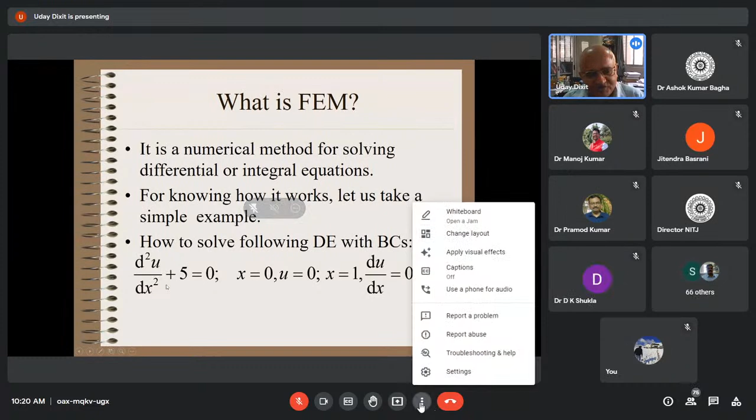Now, I have deliberately chosen a very simple example. Suppose this differential equation has been given to you: d²u/dx² + 5 = 0. At x = 0, u = 0. At x = 1, du/dx = 0. So these two boundary conditions have been given. This is a second order differential equation.

If I ask you what is the solution of this, you can easily tell me. It is very easy in this case, because you just say d²u/dx² = -5, and then you integrate it two times, double integration, and you get back the value of u. But because of integrating two times, you will get two constants of integration also. Those constants will be found by applying these two boundary conditions. That's why you need two boundary conditions, because with one boundary condition you cannot solve it.

So you will say that the solution is u = 5x - 2.5x². You will give me the solution, is it not? Because you just integrate. First time I integrated, I got -5x plus a constant. Then I integrated again, I got -2.5x² + ax + b, like that. And then you put the boundary conditions and you give this one.

Now, let us say that I am your teacher and you are my students, and I just want to judge you. So I give this problem and you give me the solution. But let us say I myself do not know. I am a very weak teacher, or maybe not weak, but absent-minded. I forgot how to integrate. But as a teacher, I have to check whether what you have given me, u = 5x - 2.5x², is right or not, because I have to give marks on that basis. So how do I do that?

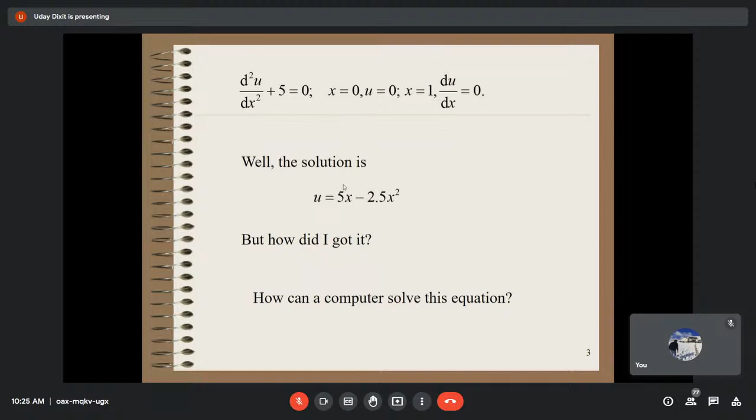Now the question is, if a computer has to check the solution in place of me, probably the computer also can check in that way. But now think of the reverse problem. Suppose the computer has to solve the equation. The computer does not know proper integration, although some software does integration nowadays. This problem is simple, but for a very complicated differential equation, how will the computer solve it? There are many techniques, but I am telling another way, like I have done.

One way is that a computer keeps substituting a number of functions in the equation. The function which satisfies the differential equation and boundary conditions is the correct solution. With this type of method, I don't have to teach any complicated algorithm to the computer, and my task becomes very simple. Let the computer assume a number of functions and try to fit the one which satisfies the equation and boundary conditions.

That becomes the correct solution. Can a computer do that type of thing? This idea looks very simple, because instead of learning the methods for solving the equations, this is a much easier approach: we just pick one. Is it not? You see, our forefathers also many times used to pose complicated problems to children as puzzles.

Many interesting puzzles of this type: suppose some people have gone to somebody's house and he has a number of cots. If he gives one cot to each guest to sleep, then there will be a shortage of one cot. And if he does it otherwise, two persons share one cot, then one cot will be unused. So what is the answer? Children are asked this type of thing.

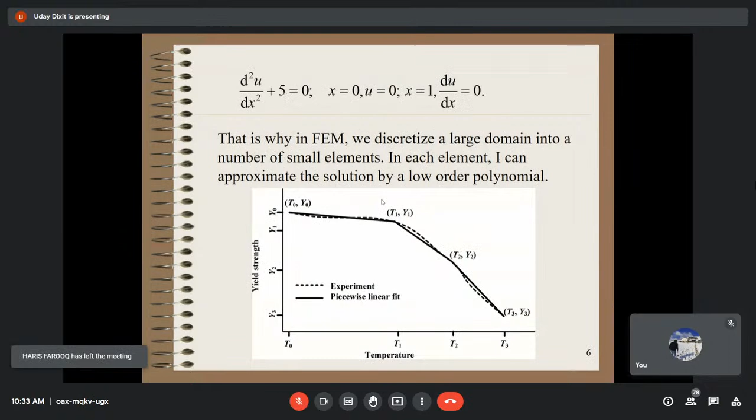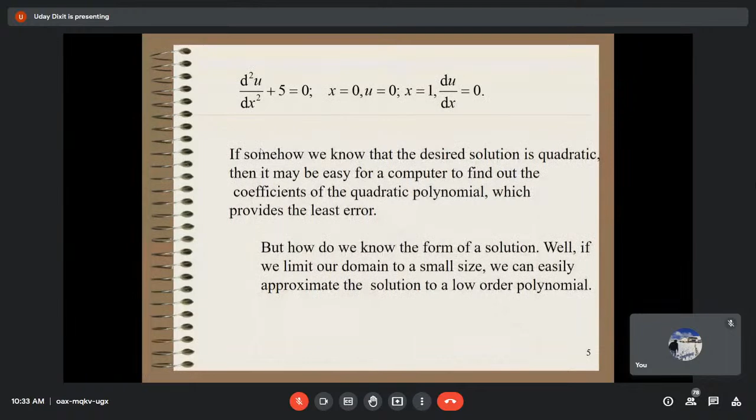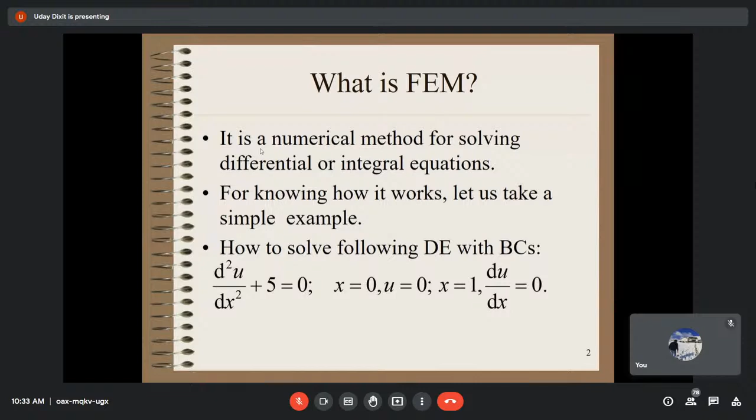So then with this, let me expand the definition, which I just said in only a few sentences. Now I am telling a little bit more, because otherwise the person who is interviewing you will not be happy. He asked you FEM and you answered it is a numerical method for solving differential or integral equations. Then he said, okay, even FDM, finite difference, also does that. Even Simpson, Runge-Kutta also does that. So let us expand the definition with this background.

So FEM is a numerical method of solving differential or integral equations in which the domain is discretized into a number of small elements, and in each element a simple form of the solution function is assumed, and an attempt is made to find out the parameters of the function by minimizing the error of the solution.

If you understand this definition very carefully, then you will understand the difference between finite difference method and finite element method. Many people are not clear about that difference. Finite difference is just what we have studied in class 12. In fact, before differential calculus came, such problems used to be solved only by finite difference. Suppose you say, what is the relation between velocity and displacement?

Now if I ask any student of class 12 to tell me mathematically, he will say V is equal to ds by dt, isn't it? That means it is the derivative of the displacement field. Okay, you get a velocity field.

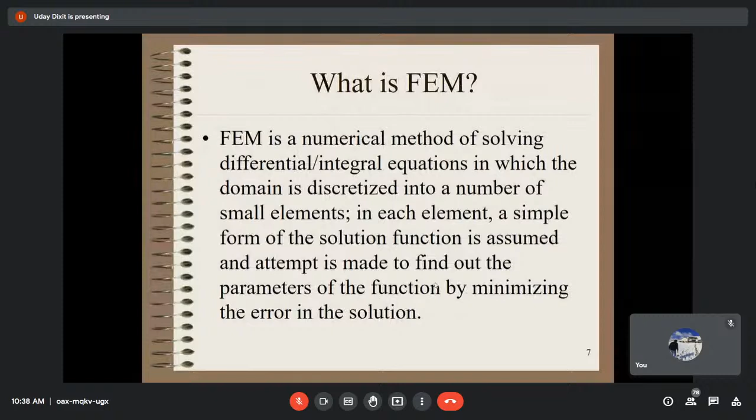But then why do we find the solution in the form of nodal values? Because many teachers and most people will make the element, make a diagram, show small elements, then show nodes. So the question I want to raise is about nodal values.

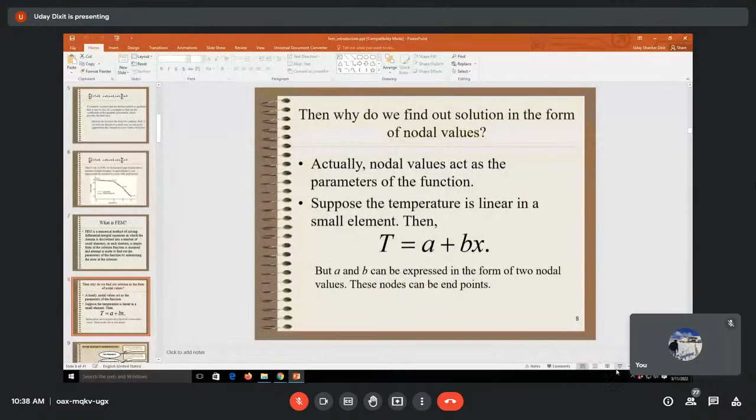Okay, so in this case the question becomes - why do we find nodal values? Because when I say find the parameters of the function that has been fitted, nodal values act as the parameters of the function. This point also has to be understood.

I gave the example already in my previous slides - suppose a temperature distribution. Many mechanical engineering people, as Pramod ji said, are doing heat transfer. So in heat transfer, suppose you have a temperature field. Now that temperature field is very complicated. But then what do you do? You can assume that in a small domain, it is linear. Let's say you are solving a 1D problem. Even in a 1D problem, the temperature distribution may be very complicated. But you assume that in a small element, T is equal to A plus Bx.

And then for each element, you find the value of A and B. And if you have done this, this is FEM. But then you may say, okay sir, some of you have been exposed to this - no, this is not FEM, we don't find A and B, we find the nodal values at the endpoints. We find T1, T2. My software only gives T1, T2, the values at the node.

So I want to say, okay, open your mind. You are actually finding A, B basically, not just nodal values, because T1, T2 at two locations can be expressed in terms of A and B. So that is what you are basically doing. That means you are not doing any finite difference thing. It's not that you are finding the values at the nodes - you are finding the complete function. So therefore, you can also add some constant which doesn't have any physical meaning.

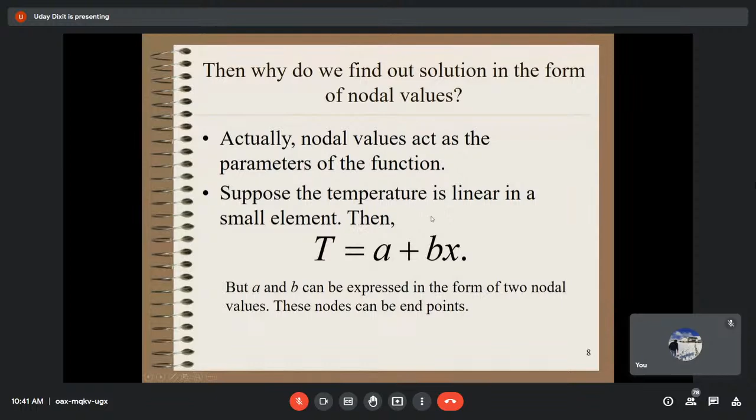It may not be nodal values. Nowadays we do P refinement - those type of things where we just add something which doesn't have any physical meaning. Nodal temperatures have physical meaning - that at this node, this is the temperature. But you can add something, some incompatible mode. So in future, you may get that type of situation. That's why I wanted to widen that thing - don't think you are only doing nodal values. You are finding the complete function in that small domain. And then with that function, you can find the value at any place.

So in general, what is the finite element methodology with this now? What does it do? The first step is pre-processing, okay?

In finite element packages, pre-processors are there. Here you make a geometry, and that geometry is discretized into a number of small elements, which is called mesh generation. Mesh generation itself is sometimes a very important activity, and many people in computer graphics work on automatic mesh generation.

Otherwise, manually also you can make it - you have a domain, you discretize it. If it is a 2D problem, you can have a number of triangles, you can have a rectangular one, or other shapes. So this is the pre-processing step, and then you can assign material properties, etc.

Before doing the FEM, you make this preparation. Then, because we discretize into a number of elements, for each element algebraic equations are found. This can be done by various methods, even direct FEM formulation based on the physics, but there are other methods too, which we'll touch upon a little. This part, how to make the elemental equations based on the differential equation, requires some skill.

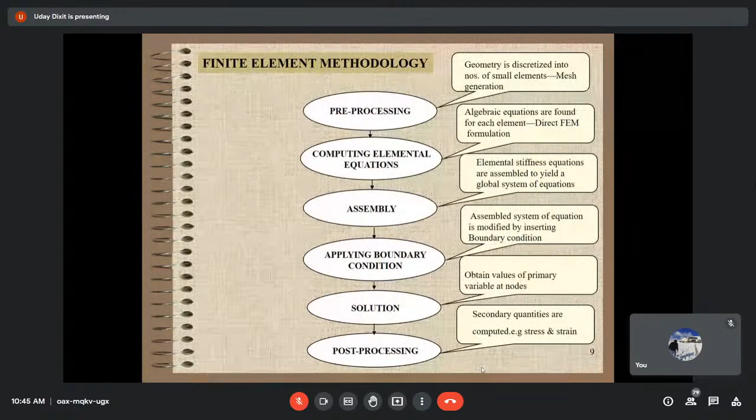So packages will have a pre-processor, a processor that combines all these steps, and then a post-processor. Now the question is how the package does it, or how FEM works - I am explaining this with a very simple toy type of problem. But if you listen carefully, you will understand that this is something you can learn and do.

What is that problem? It is a direct FEM formulation of an axial rod problem. This is an axial rod, I am stretching it by applying a load P. In this case, the deflection becomes PL by AE, where A is the uniform cross section. So it's an obvious problem, but let us try to do it by FEM - let us say I don't know that the deflection is PL by AE.

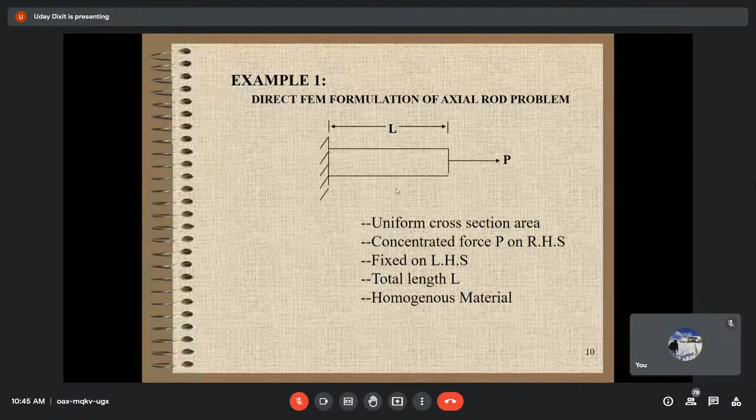I have taken a very simple example, but you can have a tapered rod, and for that problem you will face difficulty. If material properties change from point to point, you will also face difficulty. But in FEM, for each material - suppose up to first half it is brass and up to second half it is steel - you can make two elements, putting the property of brass here and steel there. So there are advantages, but for explaining purposes I take a very simple example so you can keep understanding.

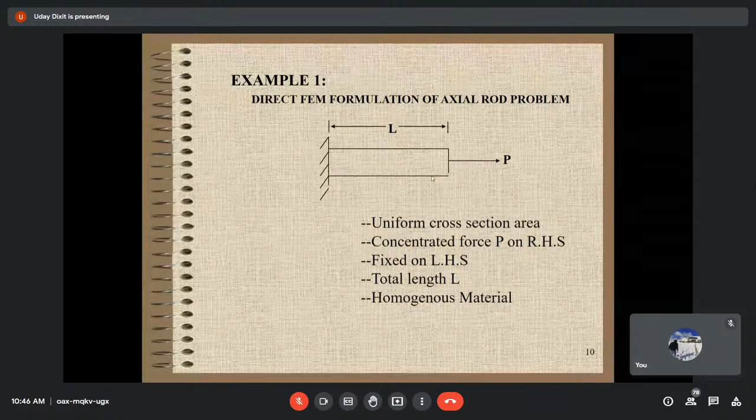So the first step is pre-processing. Whatever rod was given to me, I divided it into 3 elements - element 1, 2, 3, with nodes 1, 2, 3, 4. Then I want to make the elemental equation, so I choose a typical element, and here this is Fi, this is Fj, this is node i, this is node j. Then for each element I write some equations based on our understanding.

Say strain epsilon t, tensile strain is uj minus ui by h, because suppose it got stressed by j, uj, and this is ui. So uj minus ui is the relative stretching, divided by h, then stress becomes multiplied by E, then force becomes multiplied by area.

This comes from our basic understanding that AE times uj minus ui by h is equal to Fj. Now if I focus my attention on the ith node, and say that i is getting compressed, then compressive strain is Ui minus Uj divided by H, stress sigma C equals E into Ui minus Uj by H, and force equals AE times Ui minus Uj by H, which equals minus Fi.

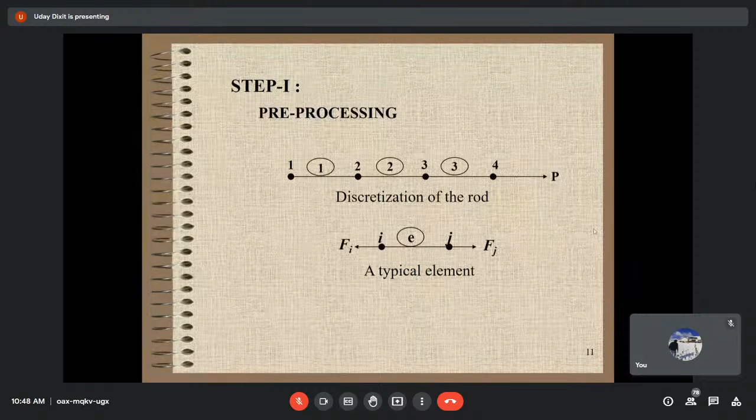Maybe some of you who have studied mechanics may immediately ask: sir, will Fi be equal to Fj? I say okay, fine, it will be equal, but I am just writing it this general way for now. Don't worry about that - the equations are also showing that AE times Uj minus Ui by H is nothing but the negative of Ui minus Uj by H, so of course they will be equal, but for the time being allow me to write it in the general way.

So this is AE by H times the matrix 1 minus 1, minus 1 1, times Ui Uj, equal to minus Fi, Fj. What I have done is written these two equations in the form of a matrix, because after all, what is the major use of matrix algebra? Why do we study matrices? Because I can express my equations in matrix form. So what you are seeing is nothing but these two equations.

So we say Ke Ue equals Fe. We call this coefficient matrix Ke, this Ue, and this Fe. With the analogy of the spring mass system, I say Kx equals F. So K becomes the stiffness matrix - K is the spring constant, so stiffness - and U becomes the displacement vector, and F becomes the load vector.

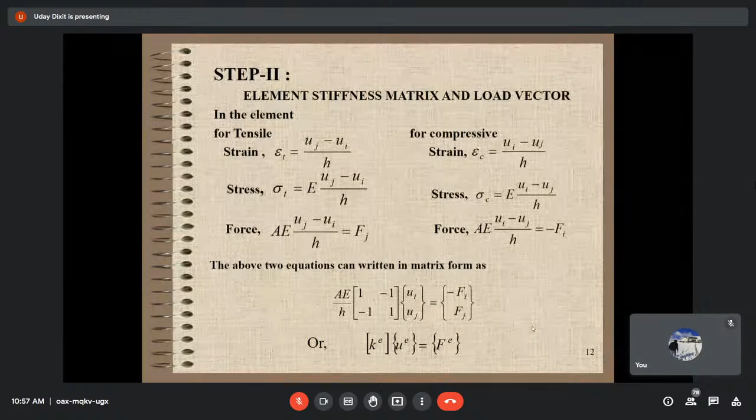This is the mistake many people make. Sometimes a simple thing becomes very difficult to explain. Complicated things people understand very easily. So pay attention to this part. It is very simple, but 90% of students do not understand, and with great difficulty, I spend half an hour, then they get the idea.

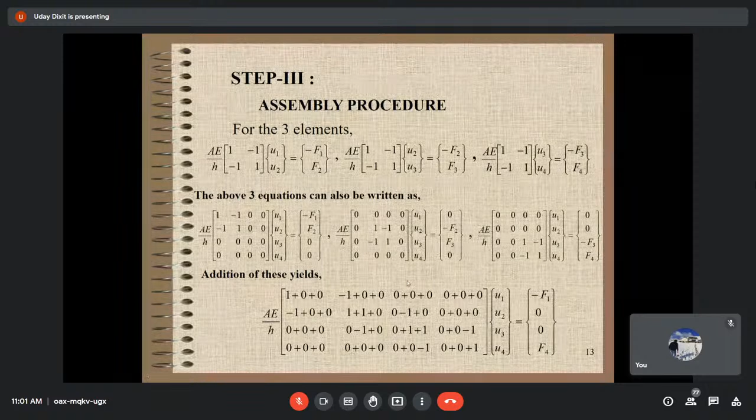Somebody might just give a twisted problem. If I twist it, students who learn by rote will not manage. Suppose I know U1 is not 0, but I know U2 is equal to 1. Now solve the problem and apply the boundary condition. Now the problem has U2 equal to 1, and here it is F1. But for one who understands the basic concept, it is child's work. U2 is equal to 1, so the first equation will be 0, 1, 0, 0.

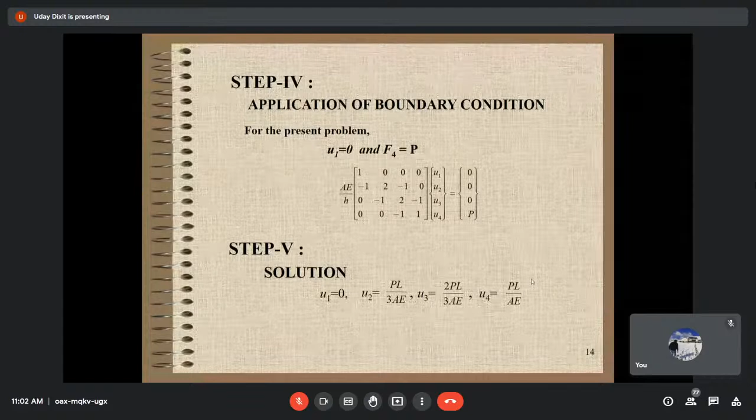By solving this, you can do inversion yourself, you will get this solution, and we know that this is correct also. In that proportion it has come. So now once we have got the solution, then we may do post-processing many ways. I can plot a graph of this, that is also post-processing. But let us say that we want to find out the strains and stresses.

So in this example, strain in element 2 is equal to U3 minus U2 by H, and this is U3 minus U2 by L by 3. So P by AE, and stress is given by E into epsilon, that means P by A. So based on that, I find out the strain and stress.

So up to this, if you have got any question, is it okay? Otherwise, I can move ahead. But if you have got any question up to this stage, you can ask. Any question? Manojji, is there any question? Should I move ahead? Yeah, please sir, move ahead. Okay, they have understood. Are they listening, or have they kept it on mute? Okay. It is similar. So now, is it okay? Yes, sir. This is fine, sir.

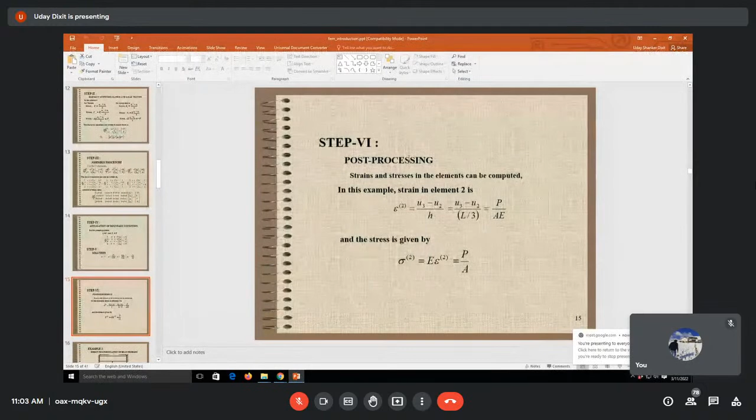Okay, fine. Now, we come to post processing. Let me just give you one more example. We will be solving the beam problem also. Suppose we have this type of beam, fixed beam with a central node. Here also we can do pre-processing. I have taken only 2 elements just to make it easy, first element, then second element.

At the middle, at location 2, I have put a load, a force P there. So it is better to take a node point where the force is. Now if I take the typical element E, I and J are the nodes. Typically in a beam problem, you have deflection as well as slope, so Vi and theta i. Here also you have deflection and slope, and you have vertical force and moment.

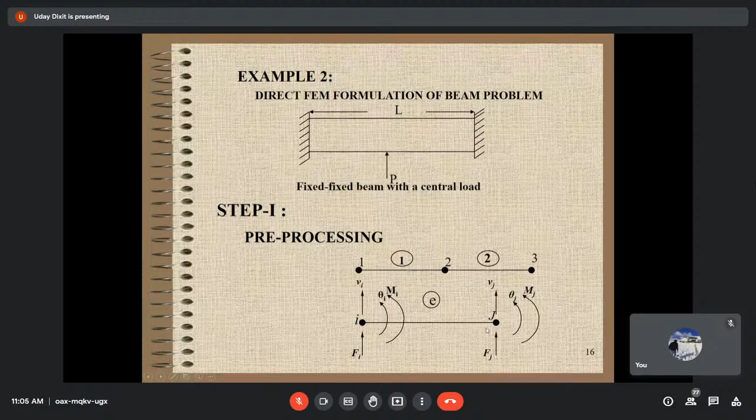So the problem has become 1 degree higher. Earlier I was solving a 1D problem, but otherwise there is no difficulty. Like in the previous case, we can get the elemental equation in this form: K1, K2 are the coefficients, with Vi theta i, Vj theta j, and Fi Mi, Fj Mj. That means shear force and bending moment depend on the deflection and slope. How do I find that? I can still apply the strength of materials approach: suppose force Fi and bending moment Mi are acting.

So Fi h cube by 3EI minus Mi h square by 2EI is equal to Vi. Similarly for this one we have written; I am not going into details. Those who want to revise strength of materials should ensure that this is correct. Suppose Vj is fixed and you are considering the deflection Vi under these forces. So you will get these 4 equations, which you can write in matrix form to find the coefficients.

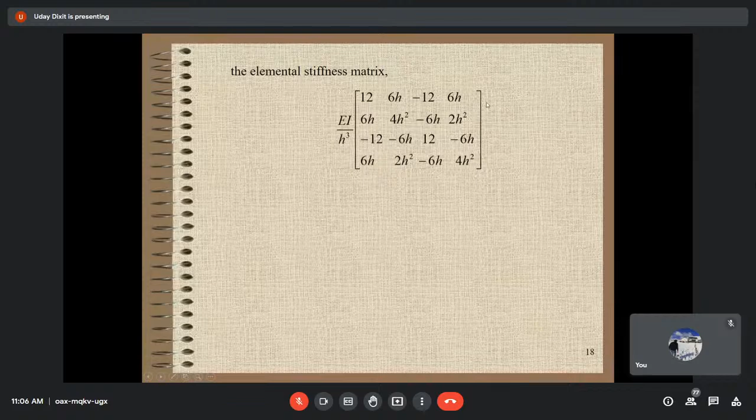This is written in terms of Vi, but you have to do inversion, bring this side to this side, and then you will get these equations. So your elemental stiffness matrix will become like this. This is the elemental stiffness matrix for a beam problem. So now we should do assembly. In the same way, we write elemental equations in the global coordinate system.

So we just write this one, and this is V1, theta 1, V2, theta 2, V3, theta 3. So you see in the first element only V1, theta 1, V2, theta 2 will come. Third node is in fact in the second element, so a lot of zeros will come. Similarly about the forces, this is F1, M1, F2 element 1, M2 element 1. And for the second one, the stiffness equation I write like this. So this is 0, 0, F2, M2, F3, M3.

And adding this system of equations, if you add these, then you get what? You did simple addition, you took it common, and this part becomes F1, M1 as it is, because 0, 0. But F21 plus F22 together will give the total force P, because you have applied P in this case, and M because there is no applied moment, so this is 0, and you will get F3, M3. So you have got this type of equation, but you have got these 4 unknown quantities: F1, M1, F3, M3 are not known.

So how do you resolve this? You have to put boundary conditions. Applying the boundary conditions, V1 equals theta 1, V3 equals theta 3 equals 0. That means it is fixed at both ends, so slope and deflection are 0. So in the same way, the first equation is V1 equal to 0, so I can say 1, 0, 0, 0, and this is 0. Second one is theta 1 is 0, so 0, 1, 0, 0, 0. Similarly here, V3 was 0, so 0, 0, 0, then 1, 0, and this is 0. And the last one is 0, 0, 0, 1, 0. So I will still have a 6 by 6 equation, but a lot of zeros.

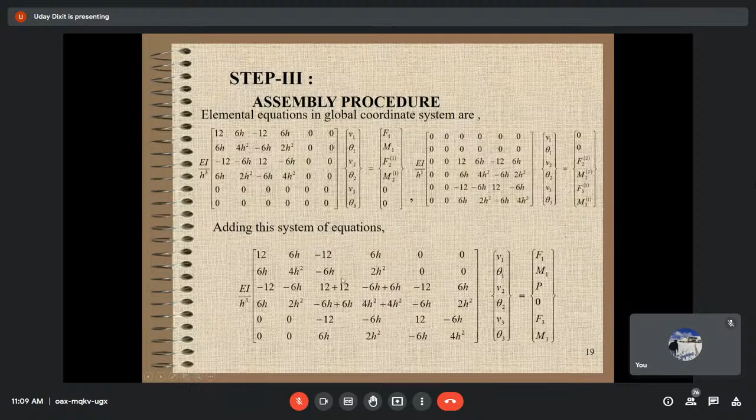Again 6 by 6, but I got a little smarter. Instead of doing 1, 0, 0, I already know that V1 is equal to 0 and this is equal to 0. Only V2, theta 2 are unknown. So why don't I just retain only the 2 equations in which V2, theta 2 are there, and discard the others? So V1 equal to 0, you can do away with this row and this column. Similarly, theta 1 is 0, so you can do away with this row and this column, and the system reduces to this. So it becomes very simple, it becomes 2 by 2, and you can always get the solution.

V2 is equal to Ph cubed by 24 EI. Put h equal to L by 2, and it becomes PL cubed by 192 EI. And theta 2 comes out to be 0. If you had done it by the strength of materials approach, you would also get the same answer, PL cubed by 192 EI. So why are you getting exact solutions here? Because here we are solving simple problems. Actual deflection is cubic, and we are also assuming cubic, because we are taking 4 things, 2 deflections and 2 slopes. So cubic function fitting is going on inside, therefore everything is okay. But in other cases it will be approximate only. So this is also important.

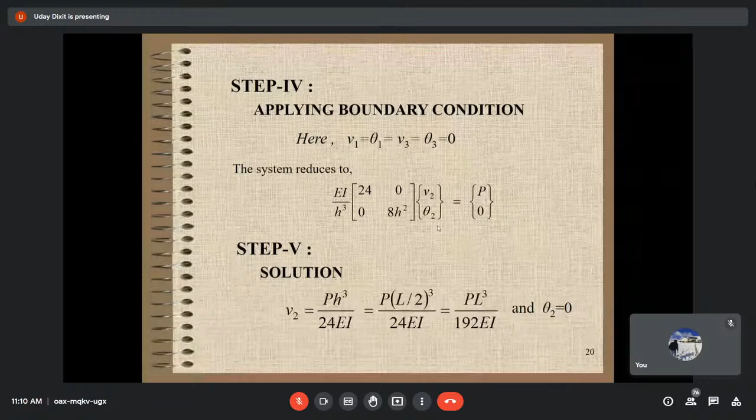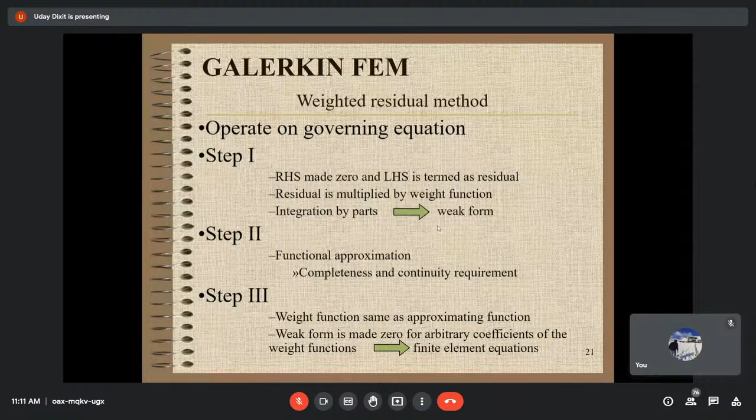Now you have understood the general procedure, and I used strength of materials, etc. But who is going to use this type of equation each and every time? So mathematicians have developed good methods. One method is called Galerkin FEM. Let me just tell it with an example, and you will understand what Galerkin FEM is. For solving a problem by Galerkin FEM, let us say I want to do it for an axial rod problem, longitudinal deformation of a rod. So I am putting the q function here. q is the load per unit length, that means newton per meter.

If I have a concentrated load like in the previous case, the concentrated force can also be written in the form of q using a Dirac delta function. That technique, you know that, okay. Otherwise, you have to do that in a complicated way.

So basically, you generate a differential equation. The differential equation of the problem is given as d/dx(EA du/dx) + q = 0. Note that this is the differential equation actually. q may be a function of x. q may be a concentrated force also, it may be something in between, but then we have to use that concentrated force multiplied by the Dirac delta function, okay. So I will not go into that.

Then you put the boundary conditions: at x = 0, u = 0; at x = L, du/dx = 0. We have that type of thing. Then, what do we do? After we have got this differential equation, it is a second order differential equation, a very strong form. So we want to weaken it. We want to make it weak. That means reduce the order.

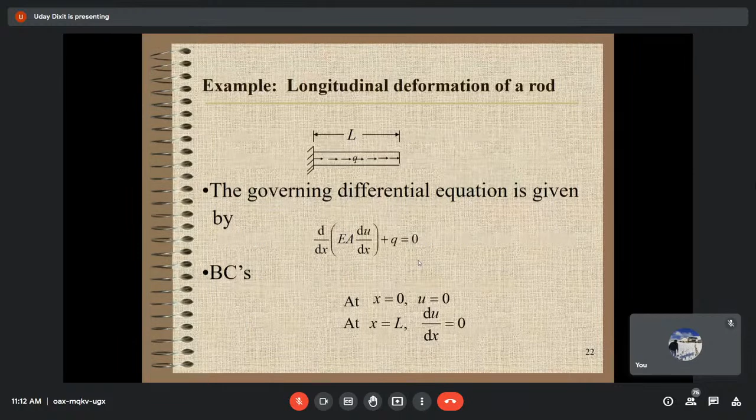So how do we obtain the weak form? Suppose we say y^e is the approximate solution of u for an element e whose end coordinates are x_e and x_e+1. So we say d/dx(EA dy^e/dx) + q = R. So it becomes a residual. Why does it become a residual? Because if y is the exact solution, then of course it will satisfy the equation. But if it is not satisfying, it will give me some error that I am calling the residual.

Now my point is that I have to minimize the residual, or I have to make it 0. But it is very difficult to make it 0 at each and every point. So I am trying to make it vanish in some average sense. That means, suppose I take a weighted average. I multiply that residual by w and then I integrate dx. Then at least it must be 0. Right? So I am doing that type of thing.

The question is that, as you said, actually it has to be made 0. If it is 0, then it is automatically satisfied. But if not, then at least it should be multiplied by w. Now, if w is totally arbitrary, that means w is anything under the earth, then this equation will be 0. That you can see. That is the lemma. But if it is not that, then it is approximate, because for some w it may be 0, but for some w it will be non-zero also.

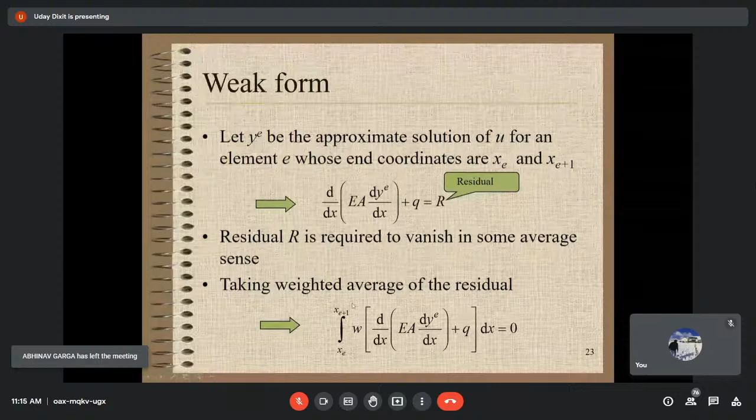But before that, suppose we have got this expression. Here w is some known function without any differentiation, and y^e is the approximating function in which you have a double derivative. So how do you do social justice? You make both first order. So how should we do that? Because then the continuity requirement will also be reduced.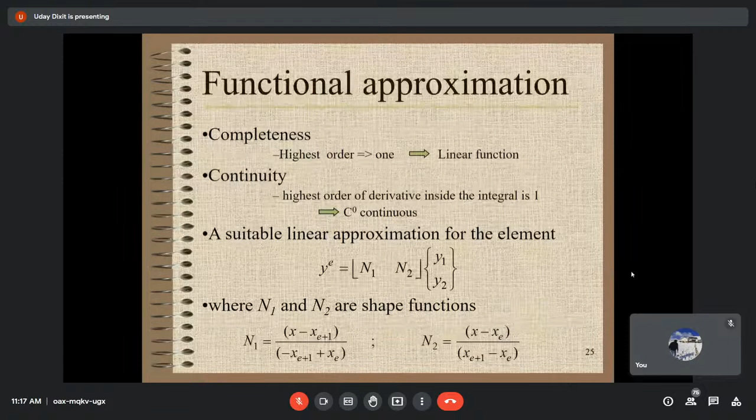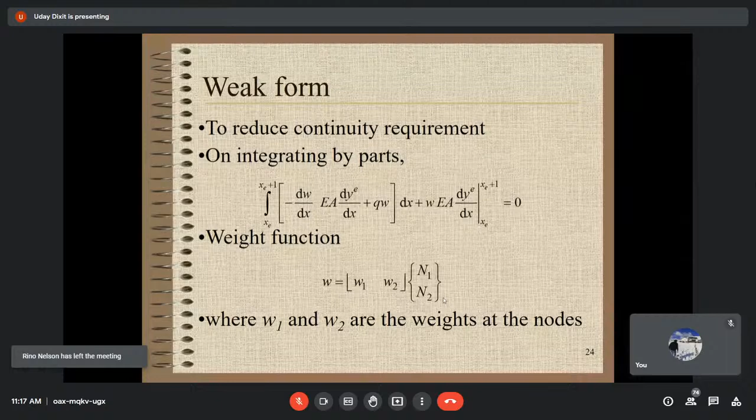So now my w1, w2, which I have kept there, will vanish from all sides, and they were arbitrary in the sense that as the linear approximation is there, these weights are arbitrary. That means this will hold good for any weights. But of course, it may not hold good for quadratic. But since your assumption is that in a small domain everything is linear, it will give a fairly approximate result. So that is what we do, and we get the same type of stiffness equation.

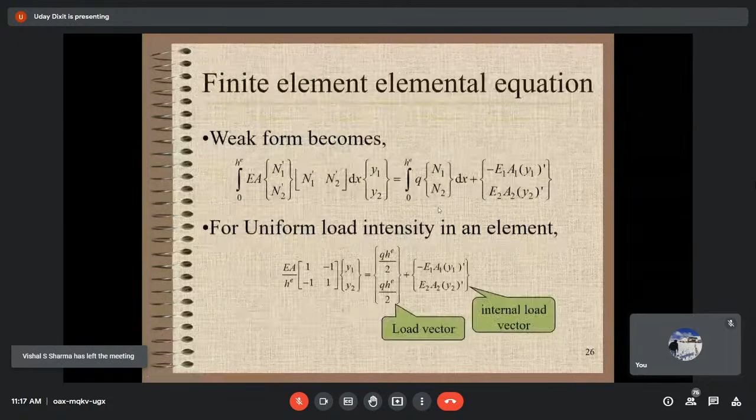You get a load vector, plus you are getting some extra term, an internal load vector. These will cancel with each other when you do assembly. Okay, that's what it comes to. And so that is one approach. This is called Galerkin FEM. In the Ritz FEM, which is called the variational approach, you go from the opposite side. There you don't need a differential equation. You have to start from energy. So any differential equation can be converted into integral form also.

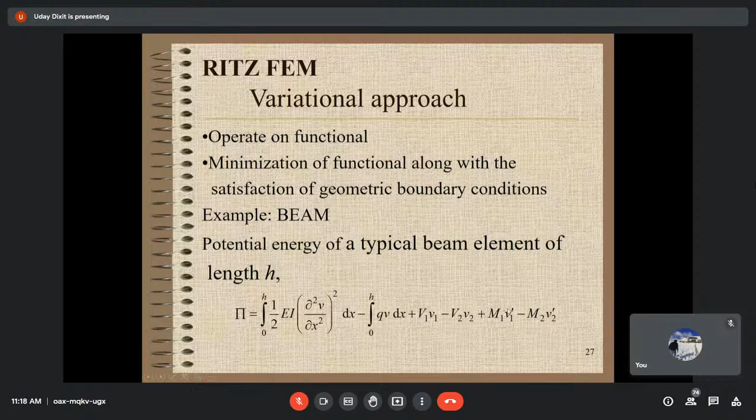So what is that? Suppose a beam problem. If I want to solve the beam problem, you have to use the differential equation of the beam, but we can do it by writing the potential energy of the typical beam element. I have written the potential energy, and then minimizing the potential energy gives the solution. So here you don't have to make the weak form because it is already a weaker form. Completeness the same way; the highest order of derivative inside the integral is 2. So C1 continuous, and you take this type of shape functions, element approximation.

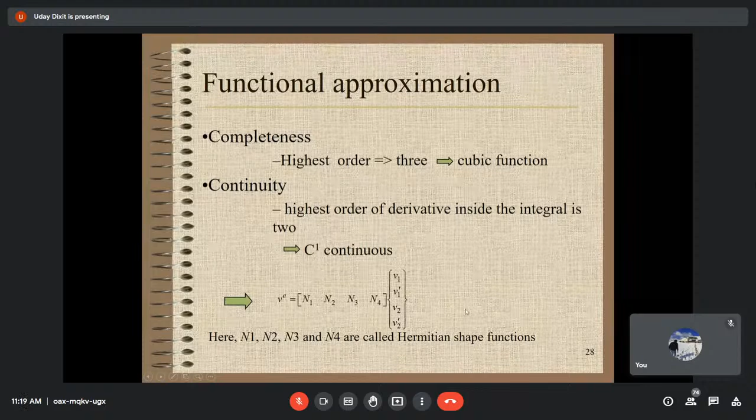Actually, you will take a plus bx plus cx square plus dx cube, and then by putting the nodal values, you will get this type of expression. And then you put it in and minimize potential energy with respect to the elemental variables, and you will be getting this type of thing. So this is the Ritz approach.

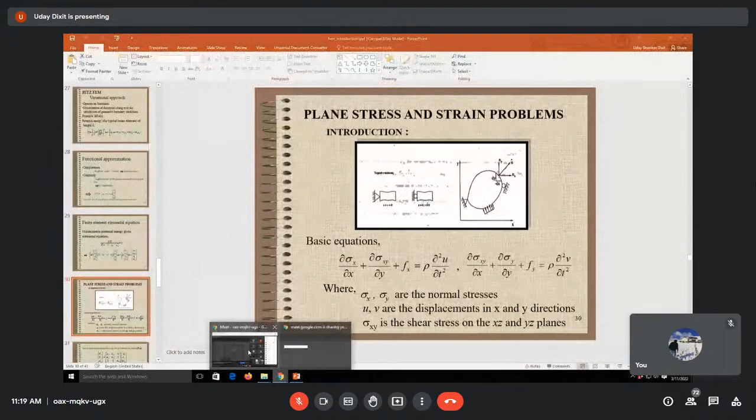Manojji, do I have some time? How much time? Yes, sir, you can continue, sir. 15 minutes. 15 minutes, sir. 15 minutes I can continue. Okay, fine. Yes. Okay, right.

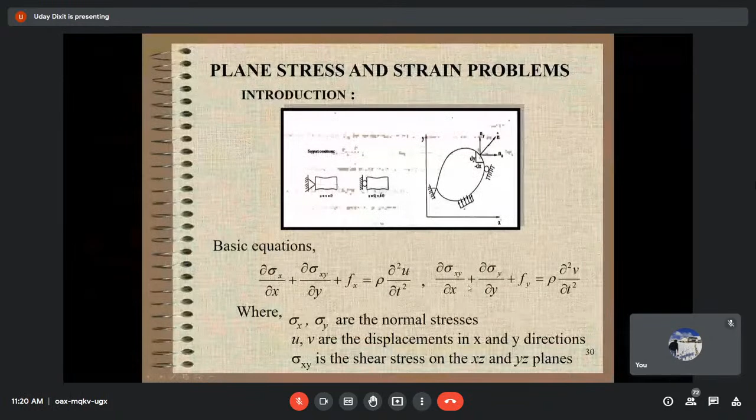So then this is this one. Stress and strain are related by the constitutive matrix. So you have to take a constitutive matrix. Everything in FEM, if you want to write coding, etc., you have to be strong in writing the equations in matrix form. It is nothing big. It is the same equation, generalized Hooke's law, epsilon x is equal to 1 by E sigma x, but the whole thing I am writing in matrix form. So these are called the elasticity constants.

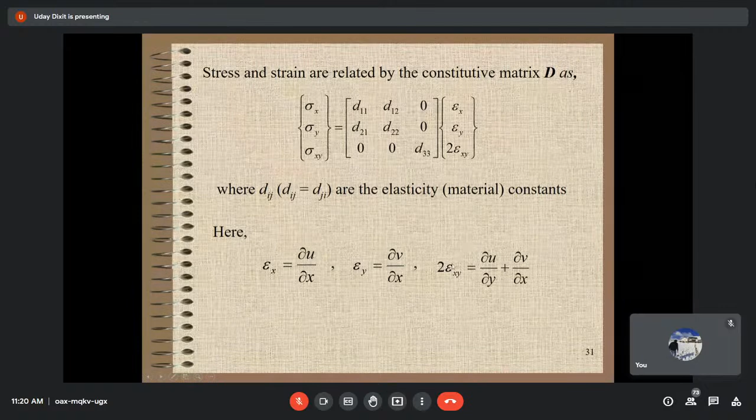This is the strain displacement relation. Epsilon x is equal to del u by del x, epsilon y is equal to this much, and 2 epsilon xy is equal to this much. So then you can solve this 2D problem the potential energy way also. You write the total potential energy in terms of the stress and strain, as the thickness is independent of x and y. You can write this equation, the potential energy.

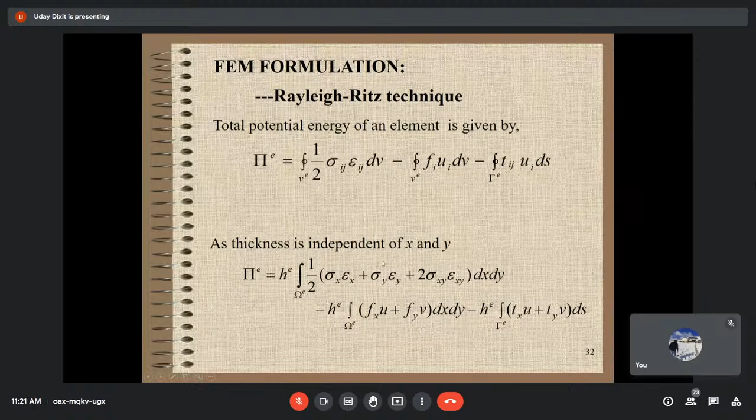Then you write that whole thing in matrix form. Even the product sigma x epsilon x, sigma y epsilon y, this big expression in which three terms are added, I am writing like this. This row vector of strain multiplied by this, the dot product becomes this. So that's how I am doing that. Everything I am writing in matrix form. Then developing the equation becomes easy.

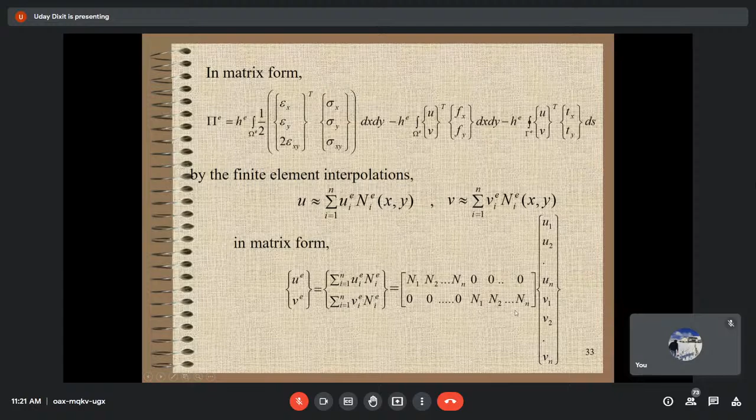Then you put the finite element interpolation approximation ui in terms of Ni, and that you also write in matrix form: N1 to Nn, and this equals this. Then put everything in matrix form, and you get this. Epsilon E becomes like this, sigma E becomes like this, and you substitute it there, then differentiate with respect to delta E, meaning the nodal vector.

Just as you do differentiation with a scalar quantity, you can differentiate at one go with a vector. You should be familiar with these things: if you differentiate delta E transpose delta E with respect to delta E, two terms will come because it is square type. But here it is only one delta E transpose, so the square type term will not come. These things you have to be very familiar with.

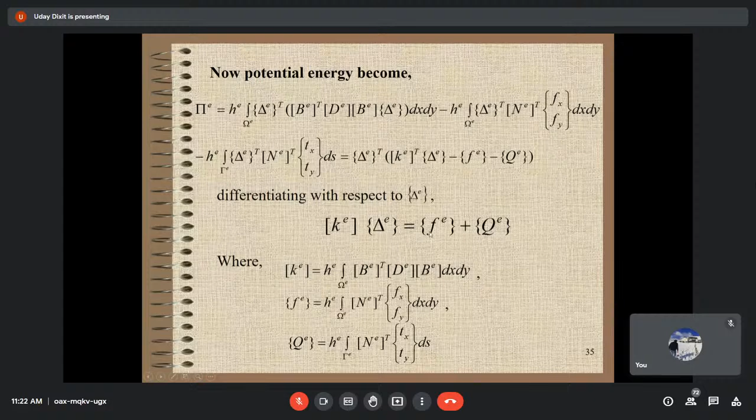After doing that, automatically you will get this equation, and this will be called the stiffness matrix. This will be the load vector, and this is the internal load vector, like that. So the procedure is very simple.

Now the element can be any type. You can have it in 2D, you can have a four noded element, and you can have interpolation functions like this. You can use natural coordinates, xi eta, instead of physical coordinates. All these things you will study in finite element courses, which is why it becomes one semester course. Otherwise, essentially, it is what I have told in one lecture, which is enough to understand finite element.

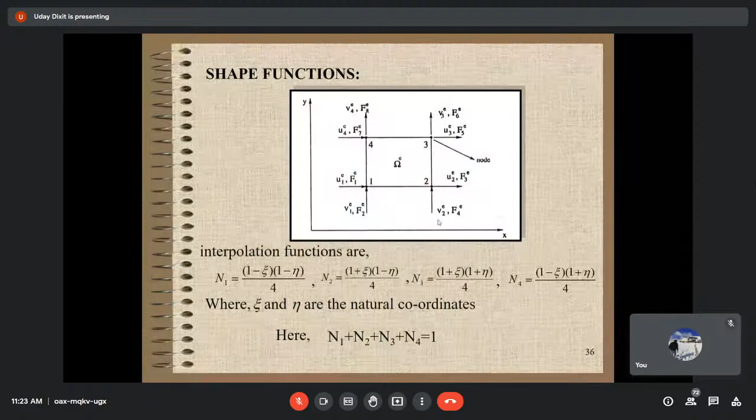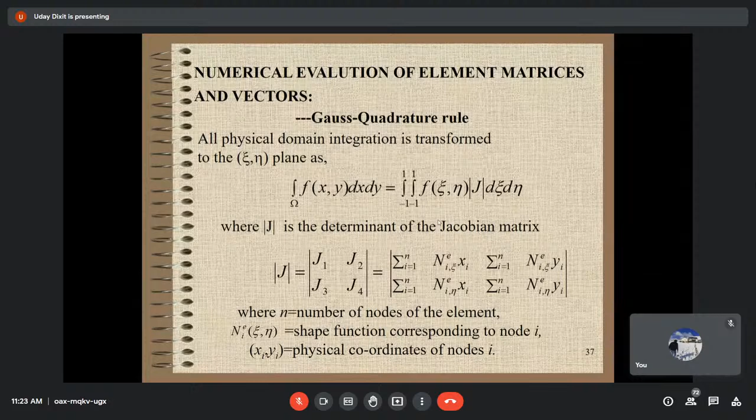You will do that. Also, 2-3 lectures will be on this topic: how to find the stiffness matrix and other things, but also how to integrate. Your teacher will teach a course on Gauss quadrature for 2-3 lectures. That integration can also be done numerically using Simpson's rule, but Simpson's rule is not that good. In fact, Gauss quadrature works better, so we teach that also.

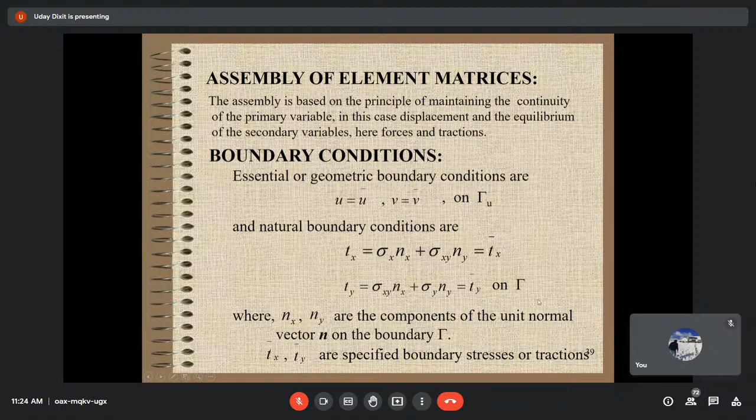We teach Gauss quadrature, and then we apply the assembly of elemental matrices, which is done automatically in your package. Otherwise, the procedure is the same as I have told. Then put the boundary condition. We have essential or geometric boundary conditions like displacement prescribed, and natural boundary conditions like traction vectors prescribed. You put the boundary conditions, then do the solution, and that much you have to do.

This is finite element, but in the package, I just have to make the diagram and say this is the plate-with-a-hole problem I have to solve. So I can be a little clever also. I say it is symmetric, so why don't I cut it into 4 parts and just analyze one part?

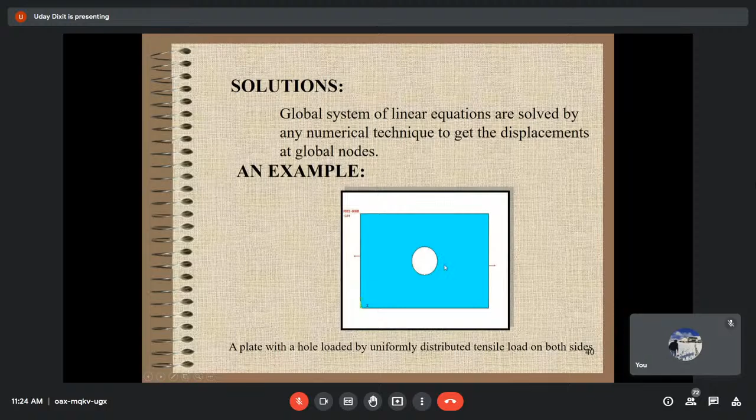I can do that one part, and I have to carefully understand the boundary condition. Because of symmetry, it will neither go up nor come down; it is equal on both sides, up and down. That's why V is equal to 0, and here U is equal to 0, because it will go neither this way nor that way, and the load is applied here. This is a traction-free surface, no stress is there.

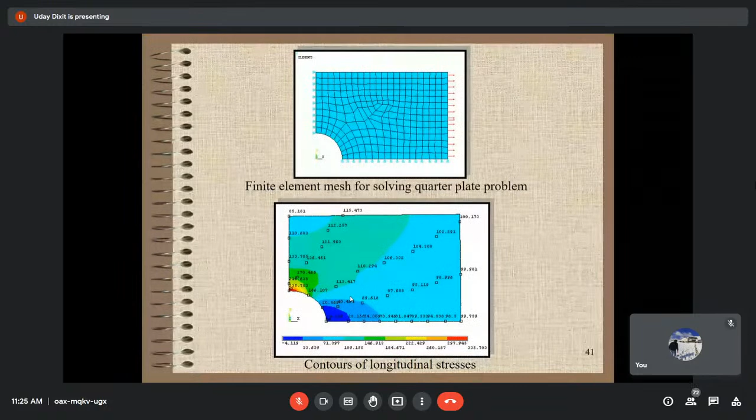So this is what I have told, and I think I'll leave the rest for discussion; this is the way FEM works. I think in this introductory lecture, assuming many of you may not know FEM, and those who do know can find another perspective I have presented.